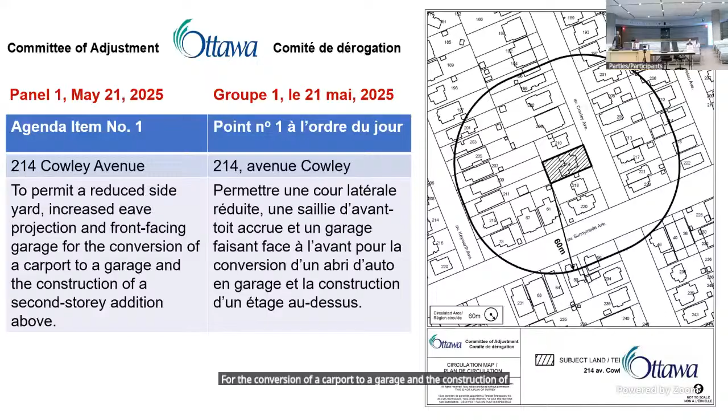This is 214 Cowley Avenue. This is an application to permit a reduced side yard, increased eave projection and front-facing garage for the conversion of a carport to a garage and the construction of a second-story addition above. I believe it's Mr. Mulholland who is the applicant's agent. That's correct. So Christopher Mulholland, Amstead Design Build.

And the address for the record? 7725 Fluellen. Okay, and very briefly, could you explain what your applicant is applying for? Yeah, so it's a fairly straightforward project. There's an existing carport with nothing above it. We're going to enclose the carport to create an actual garage. The footprint expands slightly forward, still maintaining the required setback from the front of the house to the front of the garage, and we're adding a second floor space above the garage.

The variances, the two critical ones are related to the side yard setback. The existing carport is closer than allowed to the side yard, so we're varying that setback, and related to that, we also were required to vary the overhang from that wall. The third variance is more to clean up the existing conditions.

So the SCA, when we went through it, the neighborhood doesn't allow for an attached garage or carport. Obviously that's an existing condition, so for clarity we opted to request that variance as well to legalize that current condition. So that variance A regarding the interior side yard is an existing condition. Correct, and because of the design of your extension, you're going to be closer with the drainage off the roof. The overhang will come out similar to what the existing overhang does as well. So we note that there are no concerns from the planning department regarding the application.

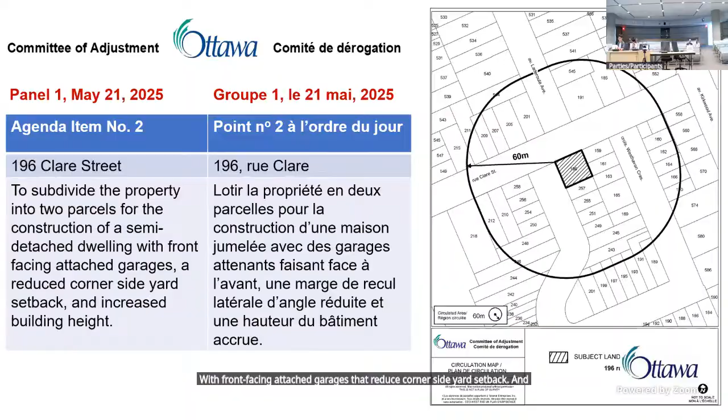Now to move to item 2 on the agenda, 196 Clare Street. This is an application to subdivide the property into 2 parcels for the construction of a semi-detached dwelling with front-facing attached garages, a reduced corner side yard setback, and increased building height. This application was adjourned a short while ago for an additional variance regarding the front-facing garage.

Mr. Sun is the agent, the applicant's agent. Yeah, my name is Chang Sun, an architect. I'm living in 33 Willowgun Drive, Canada. And I have the property owner with me today, he's sitting at the front.

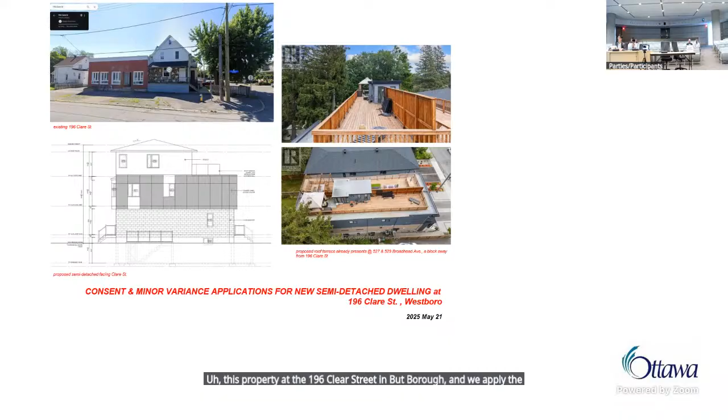So this was recirculated for the additional variance, and now you're back before us again. I think we need a presentation on this, please. Sure. This property at 196 Clare Street in Westboro, we apply the consent to severance and the minor variance application. Next slide, please.

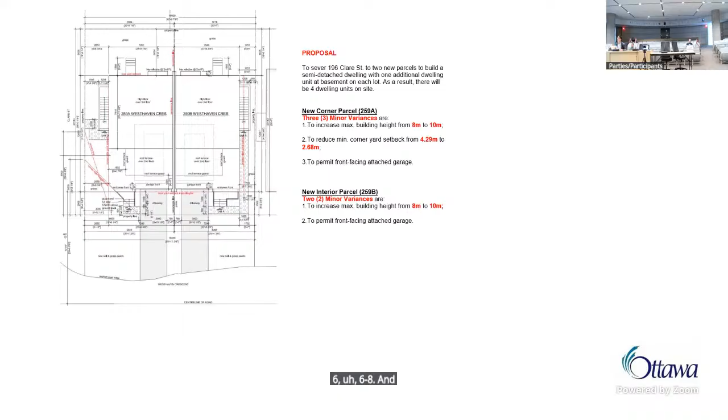So our proposal is the severance of 196 Clare Street into 2 new parcels to build semi-detached on each new lot with an additional dwelling unit at the basement. So as a result, we have a total of 4 units from this site. We applied 3 minor variances for the corner lot: increase the maximum building height from 8 meters to 10 meters, reduce the minimum corner yard setback from 4.29 to 2.68, and also permit the front-facing garage. For the inner lot, we applied 2 minor variances: increase building height and permit the garage.

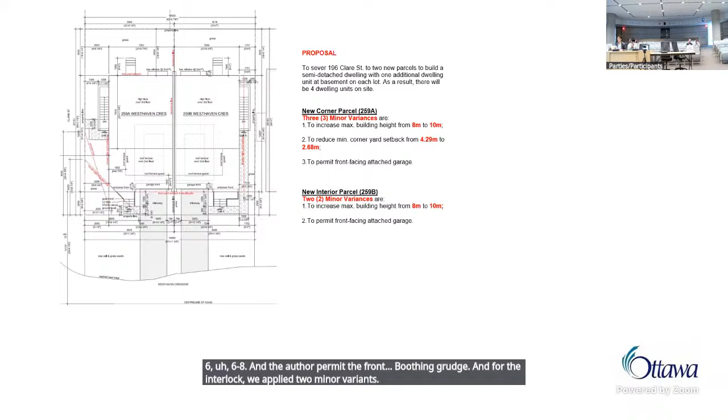This property is at inner urban transect. In the official plan, this allows intensification, middle and high density, and allows 3-story, in some cases 4-story buildings.

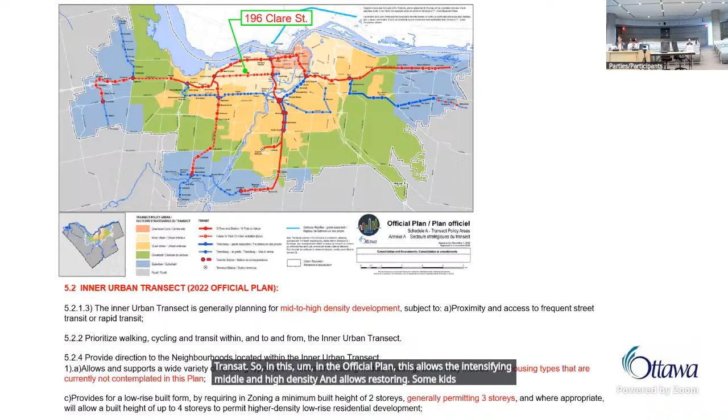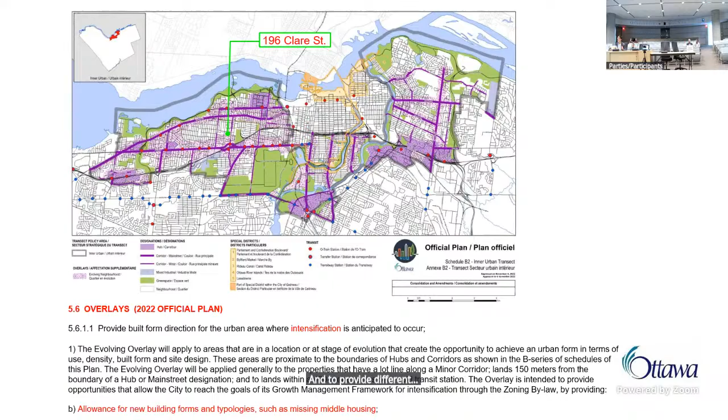This property is also located in the evolving neighborhood overlay. This policy promotes intensification in this overlay and provides different dwelling unit options, including some options not yet in the market.

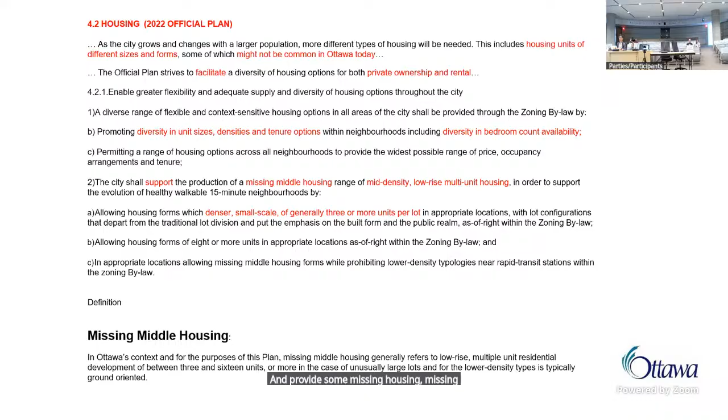The official housing policy also further promotes use of urban land redevelopment, increasing intensification, and providing some missing middle housing options.

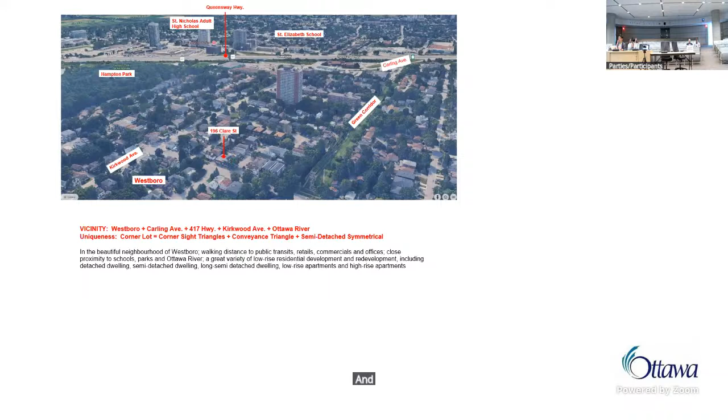This site is quite unique. It's in Westboro, close to Carling Avenue and the 417 highway, and also close to the Ottawa River, within walking distance to retail, commercial, and downtown office.

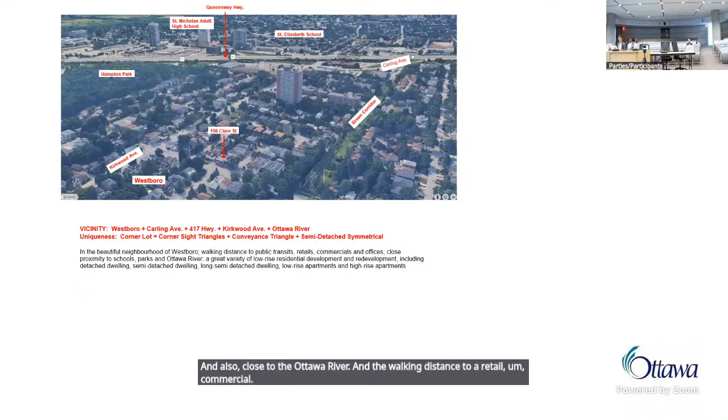This is another bird's-eye view to the Ottawa River, showing how close it is to the park, the river, and the bike trail.

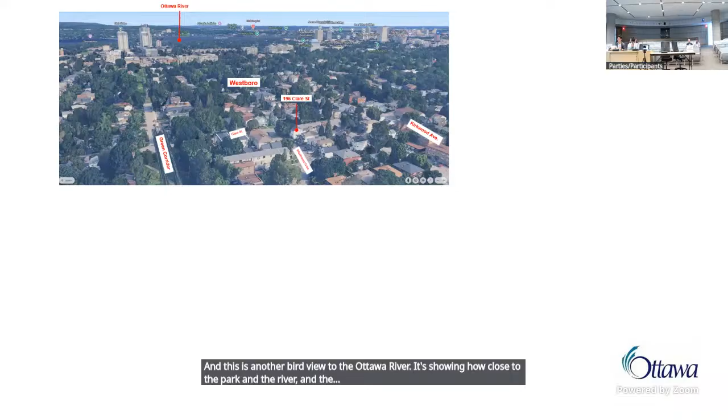This is the existing condition. We can see there's one single dwelling and an additional dwelling unit, and there's no landscape area at all—it's all hard paving. It's zoned under R3R. Parking is not required, but it's permitted.

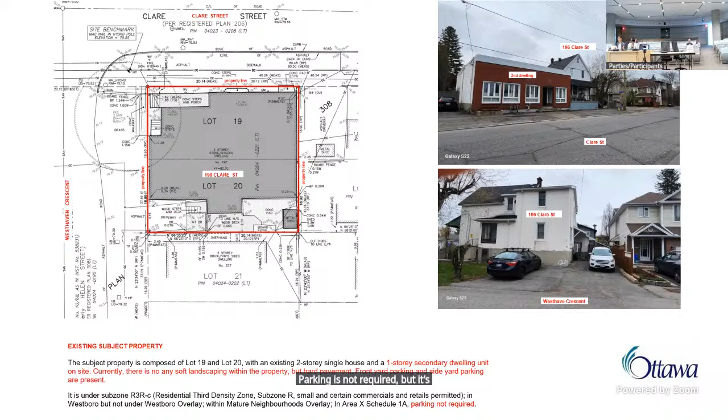We apply the consent to sever the lot into 2 new lots. This survey shows they are actually in a subdivision—there's already 2 lots, lot 19 and lot 20. We just adjust the dividing line to make the 2 new lots meet the current zoning bylaw. So these 2 lots already exist.

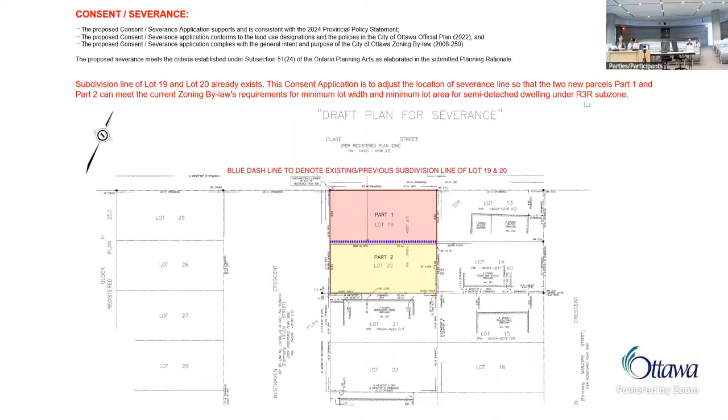Just a comment—we are dealing with the current zoning bylaw. The future zoning bylaw has not been adopted and has absolutely no impact on this committee and its decisions. So if you want to continue making comments about the new zoning bylaw, you're basically wasting your time. No problem, we'll talk to you after the end of the year when it's been adopted. Yeah, no problem, thank you.

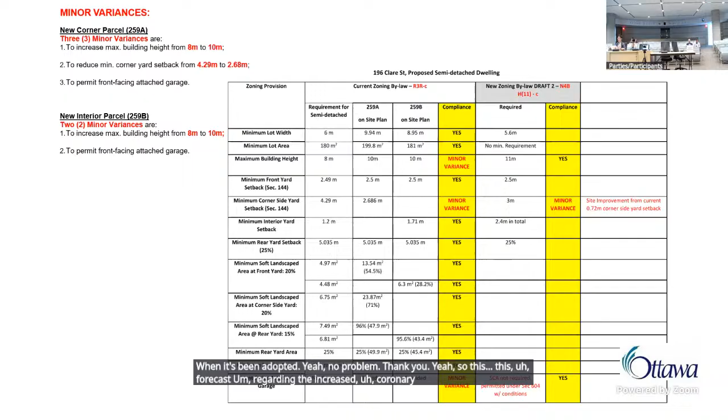This concerns the increased corner yard setback. On the right is the new site plan. We are increasing the current corner side yard setback from 0.72 meter to 2.68 meter with this minor variance, and we bring landscaping to the property at the front yard, side yard, and rear yard.

The reason we are asking for this minor variance is for a few reasons. This corner side yard setback cannot be further increased because this development will be semi-detached, and the semi-detached units must be symmetrical. If we increase the corner yard setback, the floor plan won't be able to accommodate a garage and entrance.

Another reason we cannot increase the side yard corner setback is that on the right, the inner lot area is just above the minimum requirement under the current zoning bylaw. Current zoning bylaw requires 180 square meters, and on the right we have 181. So if we increase the corner lot setback, we won't be able to meet the current zoning bylaw's minimum lot area requirement.

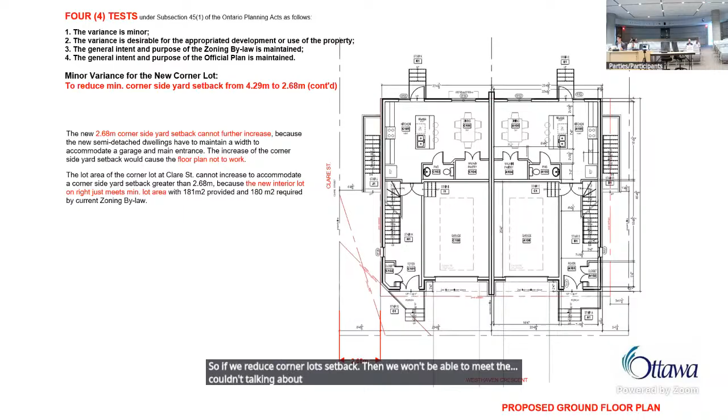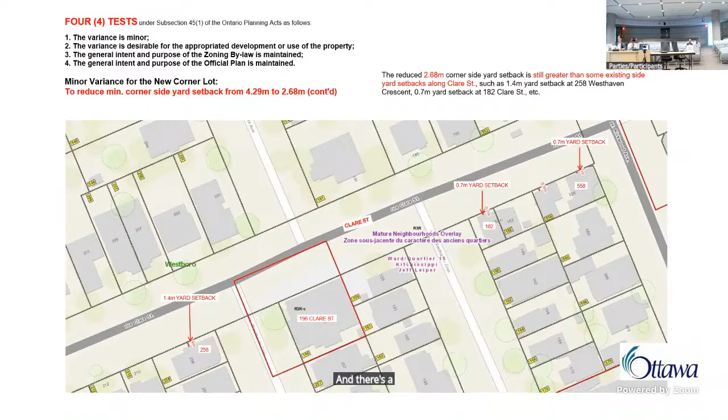This shows the current condition in the neighborhood along Clare Street. There's a property close to 196 whose yard setback is much less than we provided—there's a 1.4 meter yard setback there, compared to our 2.68 meter yard setback.

This shows the increased building height from 8 meters to 10 meters. We are asking for this increase because the owner would like to provide an additional room, bedroom, and family room to fit the household's needs. We see more of the younger generation wanting to live under the same roof, so additional rooms on several different floors will give privacy to accommodate their needs. We also provide a roof terrace for additional amenity space. My third point refers to the new zoning bylaw, so I won't mention it now.

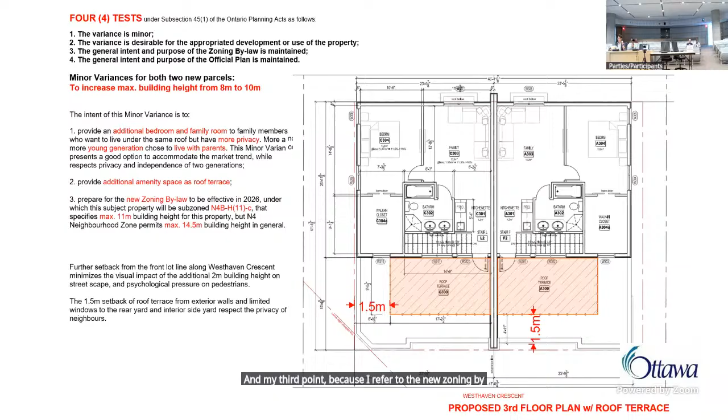And this is an example of the existing building in the same building block. So a 3-story building already there, and it has the address at the bottom.

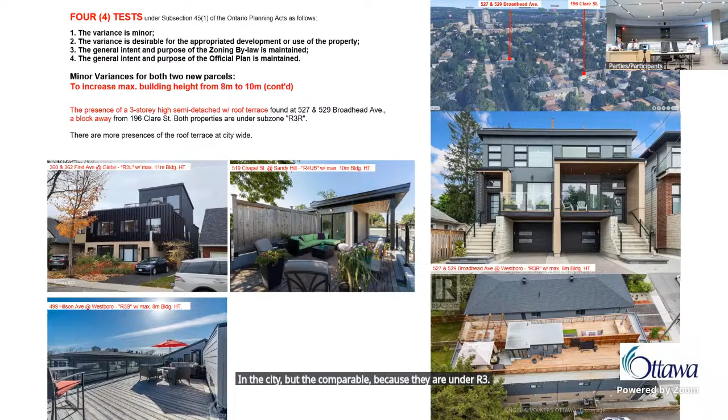Now back to the minor variance for the front yard parking. Because it's a corner lot, we did 2 analyses, one blue line and one curved red line.

Although front parking is not the dominant character in this neighborhood, on the bottom photo in the same block we see many front yard parking spots, some maybe illegal. This lot's zoning bylaw permits parking, and the owner wants the parking because, as the plan shows, there is no space for rear yard or side yard parking. So the front yard parking with a front garage is the best solution for this property.

And this will also eliminate front yard parking.

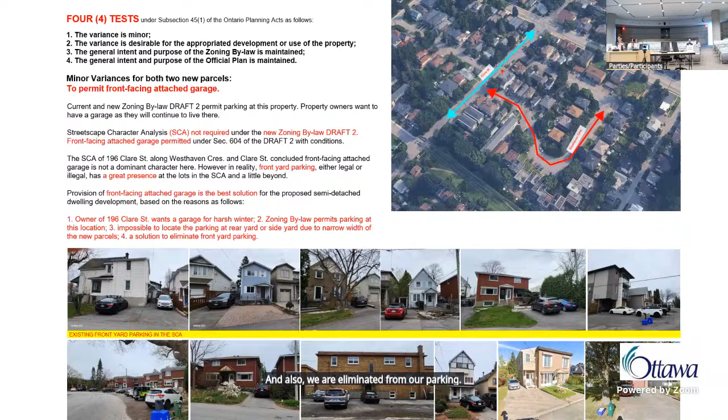We respect the city planner's comments. In order to have a front yard garage, we revised our floor plan, moved the entrance, and set the garage back 2 feet. We also lowered the building and the basement. Because of this action we had to delete 1 bedroom, so originally it was 2 bedrooms, now revised to 1 bedroom. We took our due diligence to revise our plan in order to have this front garage.

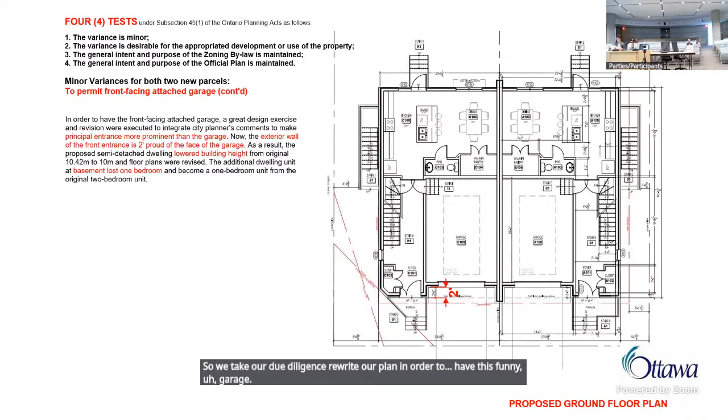So in conclusion, in my professional opinion, our application for consent, severance, and the minor variance at this property is in the public interest. I will show the last 3 slides.

This is the tree report. We have one existing tree, but it's in poor condition. On the right, showing 3 new trees that will be planted.

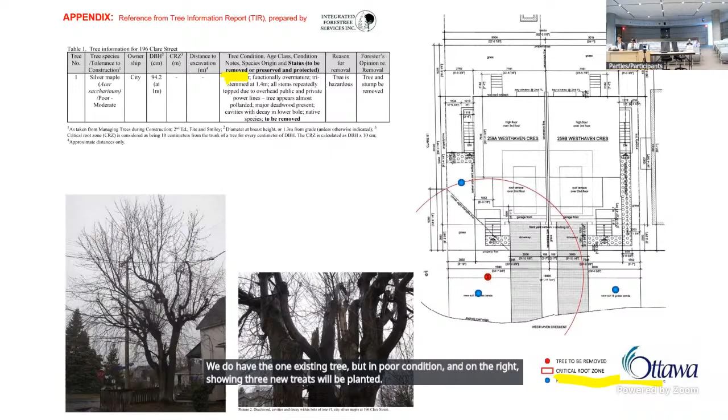Okay, that's my presentation. Thank you.

Thank you. Could we go back to your diagram that shows the sight triangle? Maybe the last one. Correct. Yeah. Okay, so you're going to be constructing within the limits of that sight triangle, correct?

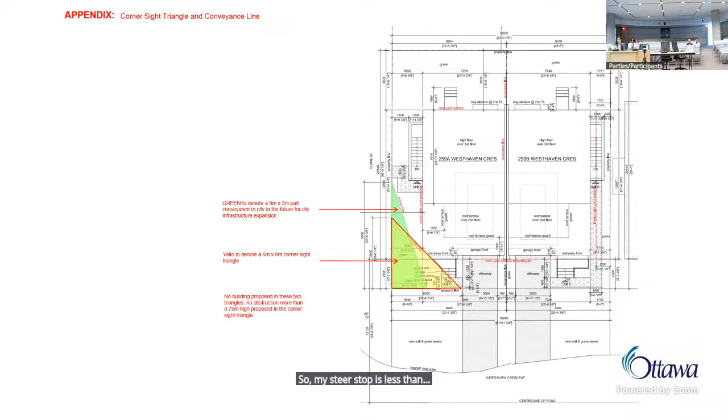Zoning says nothing can be above 0.75. So my stair step is less than 0.75. Just to the planning department, is the department satisfied that the conditions of a corner sight triangle are being met with this application? Thank you, Mr. Blatherwick. What the applicant is saying is correct, you can build as long as it is not over 0.75 meters. All right, I just want to make sure, because we don't want to have problems down the road.

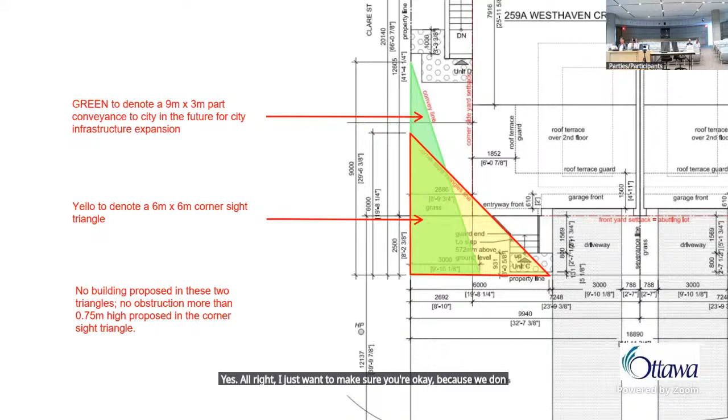Okay, thank you. Any questions from the panel regarding this application? Oh, Ms. O'Connell, you had a comment.

Thank you, Mr. Chair. Just to piggyback on the question you'd asked, Ms. Horn, there are 2 separate requirements, and the applicant very clearly showed them. One is a zoning bylaw requirement, the 6x6 requirement, which is to not block sight lines, where it says nothing above 0.75 meters. That's separate from the conveyance requirement, which is what the 3 by 9 meters is about, what the city is asking for conveyance onto the right of way. So 2 separate things.

And this application meets those requirements? That's correct. Okay, thank you. Thank you, Ms. O'Connell. All right, thank you, sir. Any questions from the members of the panel regarding this application?

I have one. Why can't you meet the bylaw height requirement? This is a new build, why can't you meet it? Because an 8 meter height won't allow the owner to have the additional roof terrace. That's one consideration. And also, although I know the new zoning bylaw will come next year, as the architect I also consider that my design should give the owner some opportunity for the future. So this is combined with looking at the existing condition. I see some similar semi-detached developments, as I showed in the photo, that have 3-story and a terrace.

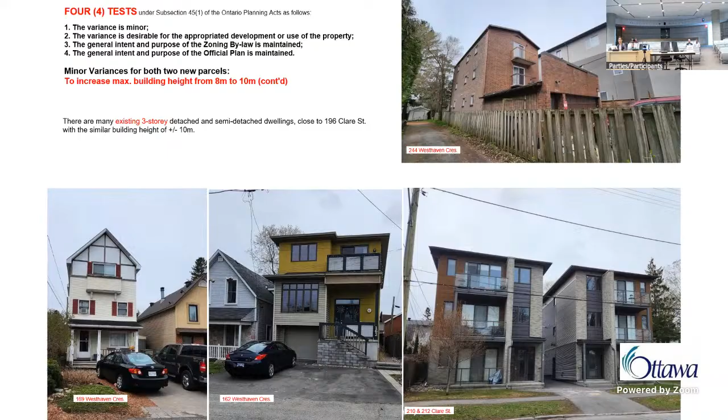We have one speaker on our list. Mr. Lammy, is he there? Yes, I am, Mr. Chair. Okay, for the record, your address, Mr. Lammy. It's 161 Westhaven Crescent in Ottawa. Okay, please proceed. Thank you, Mr. Chair, and thank you, members of the committee.

I would like to express some concerns about some of the variances being applied for here, as it seems to me there are some concerns about the intents of the current zoning bylaws, also about the setbacks and other issues. I'll start with the proposed building height, which doesn't appear to me to be consistent with the zoning bylaw and the policy intent of the official plan.

Based on the fact that the request for increased building height, and you, Mr. Chair, actually asked a question about this, seems inconsistent with the current R3R zoning designation of the property, which is really to allow for increased building height as long as it provides additional units, three unit dwellings. It doesn't seem to me that this is the case for this present application. The applicant and his agent have made it clear that the increased building height is to provide for family rooms and extra living space.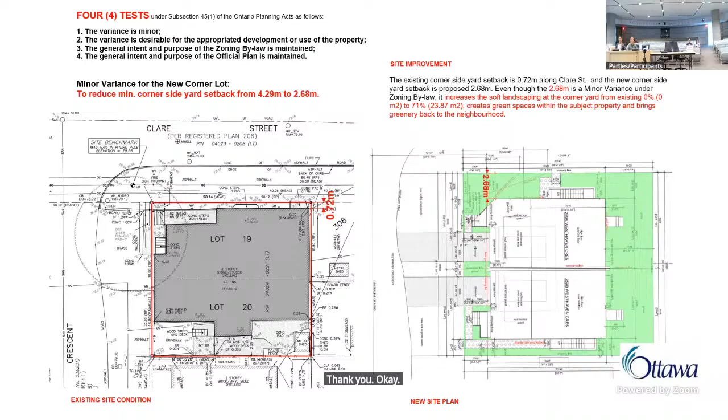I think what the committee is going to do is reserve on this application and discuss the evidence we've heard today. You'll have our decision in 10 days. Thank you, thank you very much.

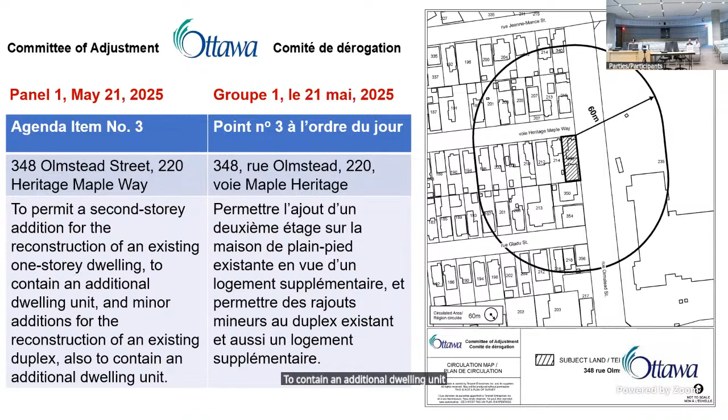Next application is item 3 on the agenda: 348 Olmstead Street, 220 Heritage Maple Way. This is a permission application to permit a 2nd-story addition for the reconstruction of an existing 1-story dwelling to contain an additional dwelling unit, and minor additions for the reconstruction of an existing duplex, also to contain an additional dwelling unit.

I believe Ms. McQuaig is the agent for the applicant. Good afternoon, Mr. Chair, members of committee. Ms. McQuaig, I don't think we need a presentation on this application.

You're going from 2 to 6 units, correct? So there are 2 buildings, but there are currently 4 units. Each building currently contains 2 units, so we're going from 4 to 6.

Okay, you're aware of the planning department's comments in their response on the final page? The new interlock area, I'm quoting, circled in green, may not be supported by bylaw services because of the use and care of roads bylaw, as they are enforcing no walkways extending into the right of way. I am aware of that comment, and I expect they will likely change that portion of the plan on the building permit submission.

The other thing I have to question you on is since this is an R4 zone application, I believe, and it's 6 units, reading the bylaw, that says section 161.15E applies, which is talking about putting impediments to front yard parking in the front yards and side yards of these kinds of dwelling units.

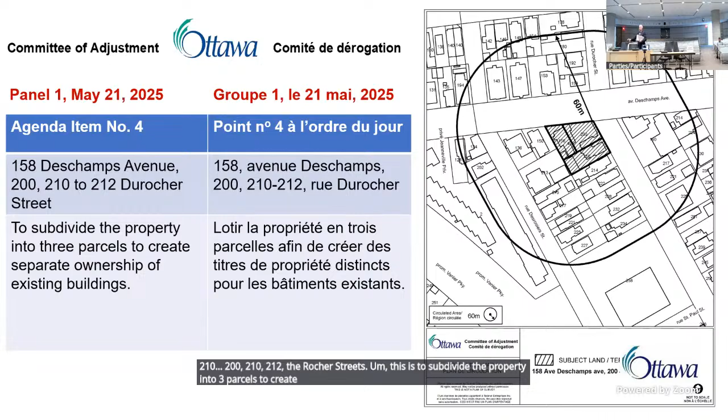So this was adjourned, and the agent is Mr. Leitman. That's correct, Mitchell Leitman. And Mr. Russell, the president of the owner of the property, is here in attendance as well. If you could just give us a very brief presentation.

Certainly. This application is to sever 3 historically separate properties that had merged by operation of Section 50 of the Planning Act, seeking to revert back to as close as possible to the original lot lines. There are some structures that are present that are to be removed, specifically garages that are shown in the reference plan, the draft reference plan that has been provided, which you'll see is now up on display.

The only real issue that has been presented to us from planning, dealing with Dylan Gildart from the planning department, has to do with the proximity of the building structures, the primary dwelling structures at 158 to the lot line, and also on the property at 210 to 212 to the lot line to its north, fronting onto 200 Durocher.

This would require some work to be done in order to address that, which is item number 1 in the conditions that the planning department had presented.

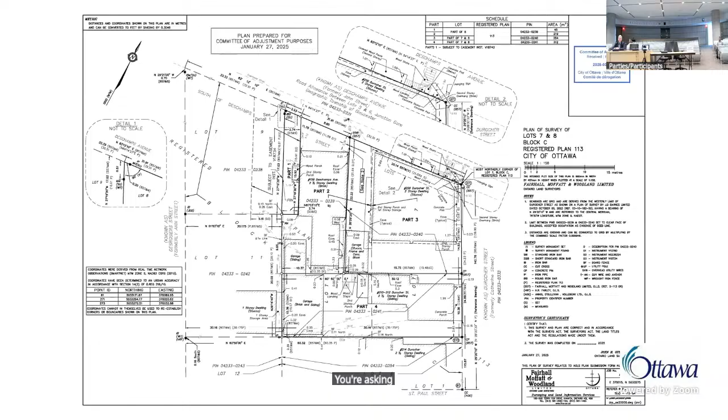You're asking us to basically sequence conditions. The sequence that we sought: in fact, we sought first the severance of 158 Deschamps, and then of the remaining lands to sever 200 Durocher, which would result in the remaining lands 210, 212.

And we understand that there's been a number of discussions between yourself and the planning department regarding this application. Correct. Yes. Okay. I'd like to hear from the planning department regarding their support or lack of for sequencing conditions.

At this time, I don't see the benefit of sequencing the approval for 158 only, because the way the condition is written is to be flexible in that, if the application is successful, they would come through the planning department and submit a new 4R plan showing those minor changes. Those would be the plans registered, and there would be no reason for them to come back to the committee. Option 4B, on the other hand, would formalize any encroachments on the property through easements, which would require them to come back to the committee a second time later on. So I don't see the benefit of only moving forward with 158 and not the severance as a whole.